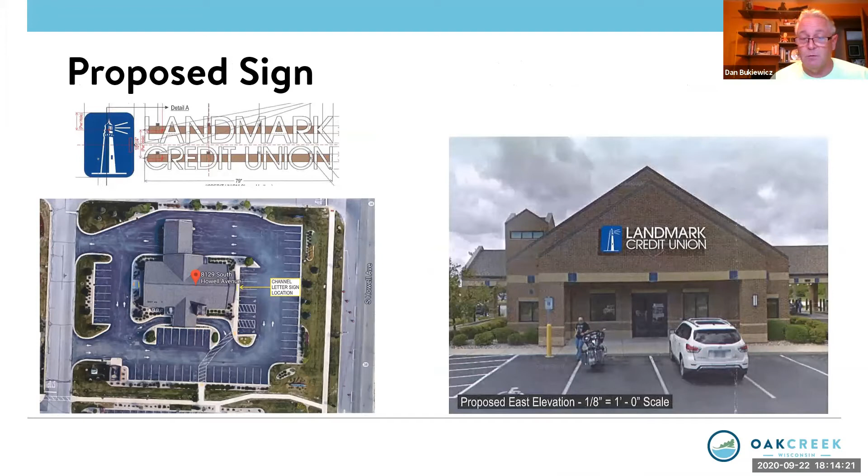Siebert moves that the Planning Commission approves a sign variance allowing the installation of one 3 feet by 6 inches by 13 feet and 3/4 inches wall sign on the east elevation of the existing building on the property at 8129 South Howell Avenue.

Thank you. Item 6B is a plan review for site, building, and related plans submitted by Crothall Laundry Service for an expansion of the south parking area on the property at 9905 South 13th. Kari?

Thank you, Mr. Mayor. The request is very basic. It is for the addition of 10 truck parking stalls on the south end of the existing property, which is in the red hatch marks on your screen right now. What they'd like to do is have a place for their trucks to park in the winter.

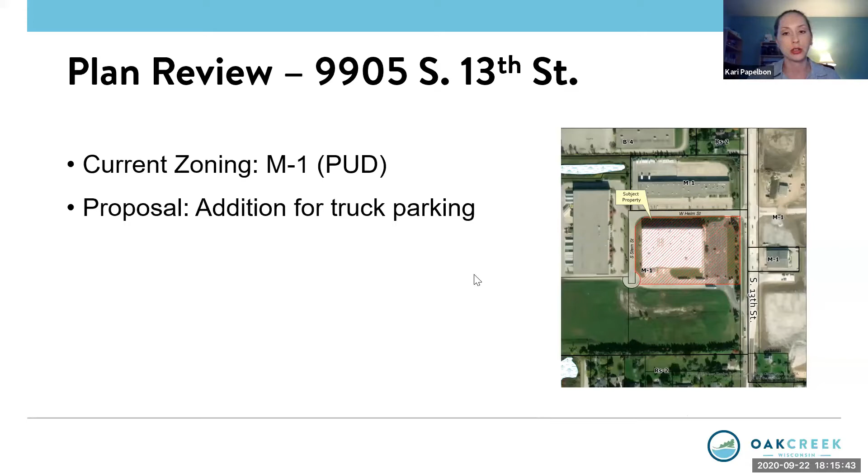They're going to add additional electrical outlets so that they can plug the engines in and keep them from going cold during the winter months. Those electrical boxes will be at each one of the stalls on the south end there.

If they are going to be seen, however, the utility boxes for these electrical outlets would have to be screened. There is nothing in the proposed plan that shows a utility box, or a separate transformer, or anything for these electrical outlets. If they would be seen from 13th Street, they would have to be screened. There are no other site modifications or any other additions for the building. Due to the location, landscaping is not going to be required for this proposal.

So there is a suggested motion that if the Plan Commission is satisfied with the proposal, that they approve with the following conditions, 1 through 3. Mr. Mayor. Thank you, Kari.

Is the applicant with us? Would they like to speak before we go to the commission, Kevin? Mr. Mayor, we have the civil engineer and the corporate engineer available to answer questions if needed. We did have the neighbor, Michael Faber, who had some questions on it. Mike, if you still have those questions, could you raise your hand? All right, he did not raise his hand, so you guys should be good to continue. Okay.

We'll start with Commissioner Chandler. We'll change it up. I do have a question for the applicant. And what's your question, Chauncey? My question for the applicant is, you've identified 10 additional parking spaces with electrical outlets. Are there any other safety measures that are required for these electrical outlets outside?

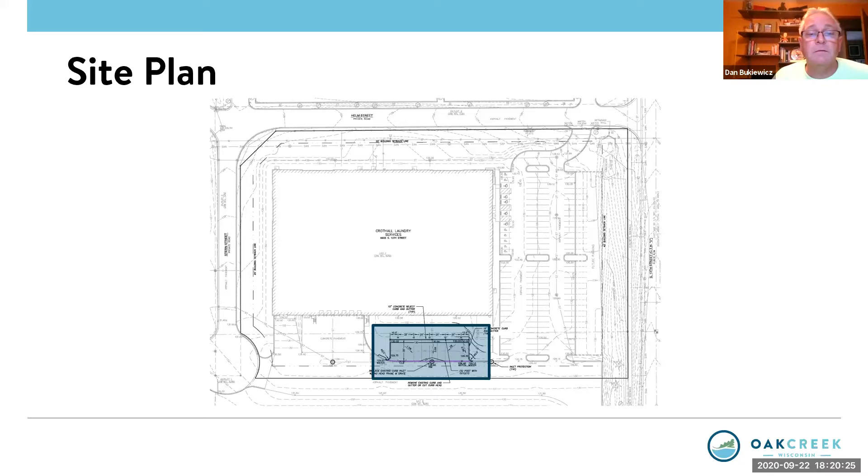Thank you, Chris. Greg? No, nothing from me, thank you. Dawn? Nothing for me. And Matt? We don't have anything either. Okay, Christine? Nothing here either, thank you. Okay, I have no further questions either.

Pretty well explained. So, Mr. Mayor, Mr. Faber did raise his hand just now. Oh, please put him on. Sure, Mr. Faber, you should be able to speak. You just have to unmute yourself.

Very good. Mayor, Commissioners, my name is Michael Faber, Capstone Quadrangle N17W24222 Riverwood Drive, Waukesha, Wisconsin. We're the neighboring commercial property owners with a building directly to the west, vacant land immediately to the south, which we are in discussion with staff on a building design that we hope will be in front of you shortly for consideration, as well as the vacant land directly across 13th Street to the east.

I just thought it would be helpful. We think that the proposed parking spaces from the applicant are perfectly compatible with our site design that we'll be coming in front of you with. And so as a result, we support the request and urge the Plan Commission to approve our neighbor's request.

Thank you for the input, Mr. Faber. Glad to see that you're that proactive, looking ahead with design and how things will match up to another affected property. So I appreciate that. Absolutely.

Any other further discussion or questions? Hearing none, motion please on B. Guzikowski makes a motion that the Plan Commission approves the site plan submitted by Crothall Laundry Services at the property at 9905 South 13th Street with the following conditions: 1, that all relevant code requirements remain in effect.

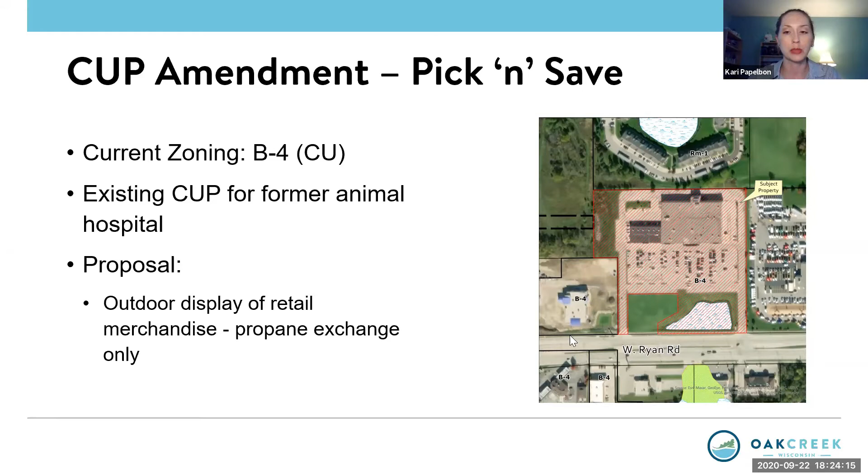So this is an amendment to that existing conditional use permit, for the outdoor display of retail merchandise, specifically the propane exchange. This is the entry elevation for the Pick and Save, showing the location of where they propose to put that propane exchange. You can see it's about 9.5, just under 9.5 feet from the far side of the propane cage to the end of that sidewalk area. The cage dimensions are listed 70 inches by 44 inches by 30 inches.

And there are a few things that are required in terms of location and compliance with fire department code, and those were incorporated into the conditions and restrictions. If there are any questions about what has been included, I will be happy to answer. Page 2 of 5 basically states there is one animal hospital and veterinary clinic that was approved in Ordinance 2632, and one area for outdoor storage and display of retail merchandise limited to one propane cage on the south elevation of the building, allowed in conformance with the conditions and restrictions. There's a separation for the specifics that were approved for the animal hospital and veterinary clinic and the outdoor storage and display of retail merchandise.

The specifics for the outdoor display of retail merchandise include that it's limited to one propane cage measuring 70 inches in height by 44 inches in width and 30 inches in depth. In accordance with all fire protection requirements and codes, it is allowed on the south elevation of the Pick and Save storefront. No other outdoor storage or outdoor display of any retail merchandise is allowed.

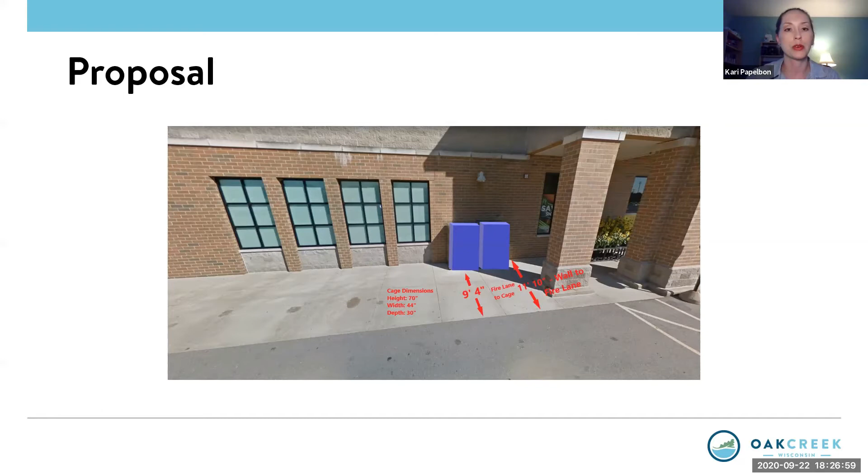Good evening, Commissioner. This is Mike Havey, Assistant Chief with Fire. All of the review material was provided to the commission, or excuse me, to Kari before the meeting. So as long as the applicants are in compliance with the requirements, we have no concerns.

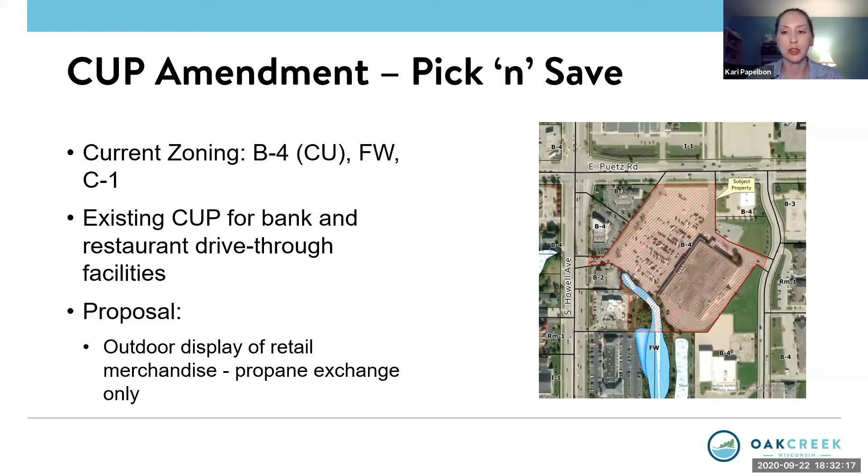You may recall the location of the multi-tenant portion has a drive-through on the south side of the building. This would add to that conditional use permit request for the propane exchange, again in front of the pick and save portion, although the multi-tenant portion does kind of blur here. Same size, although the location is a little bit closer to that fire lane.

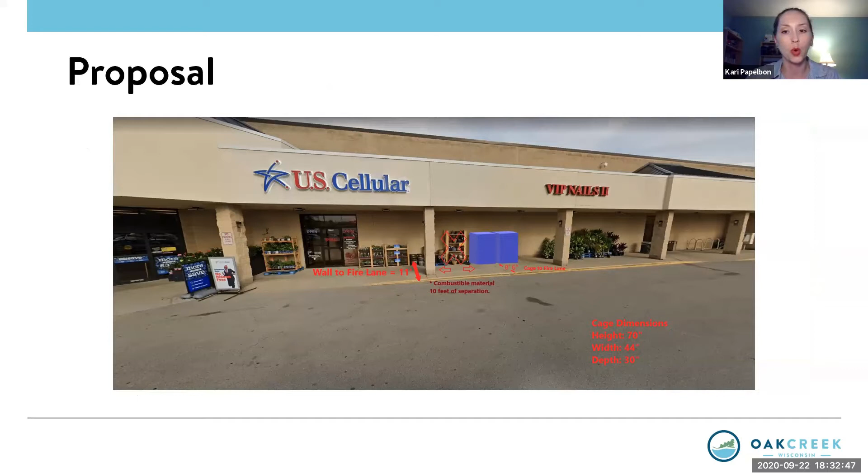It's about 8.5 feet. The previous application showed just under 9.5 feet. Same requirements in terms of meeting fire codes for location, and we will confirm that it is 1 cage for ingoing, 1 cage for outgoing, so a total square footage is being provided.

There is a suggested motion on the screen. If there are any questions with regard to the conditions and restrictions, these are kind of parsed out for the existing conditional use, and then the proposal, the same restrictions as with the other location are included in 3B.

Mr. Mayor. Thank you, Kari. Different location, same task to consider here. We'll start with Commissioner Chandler.

No questions. Thank you. Commissioner Siebert, no questions. Alderman Guzekowski, no questions. Alderman Lorik, no questions, thank you. Commissioner Carrillo, no questions. Commissioner Sullivan, none. Commissioner Hanna, anything? Nothing here, no, thank you. I would imagine fire has the same comments they had at 2320.

Mike Avey, Assistant Chief of Oak Creek Fire. Yes, no additional comments for this one.

I just have one comment, and it's not super relevant, but over on Howell Avenue, if the public's out there watching, unless you drive a fire engine, do not park in the fire lane there. It's a bad habit of people waiting in front of that merchandise. I'm surprised there isn't a picture of a car in that picture. That is reserved for our fire department in case of emergencies, so please keep those clear when possible. Other than that, I have no questions.

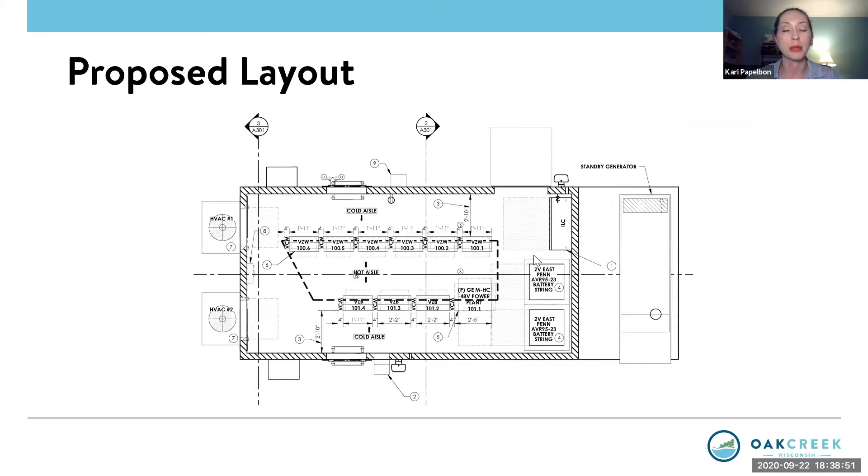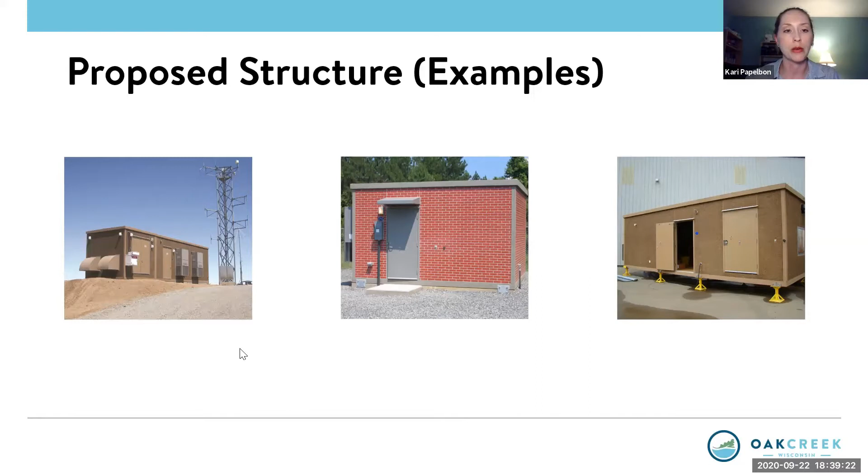With that information, if there are no further questions, there is a suggested motion for approval subject to 2 conditions of approval on the screen right now for Plan Commission consideration.

Mr. Mayor, thank you Kari. I don't know if the applicant's with us, if they'd like to say anything before we go to the commission. We do have an agent for the applicant available if questions are needed. Okay, thank you, Kevin. We'll see if he is needed.

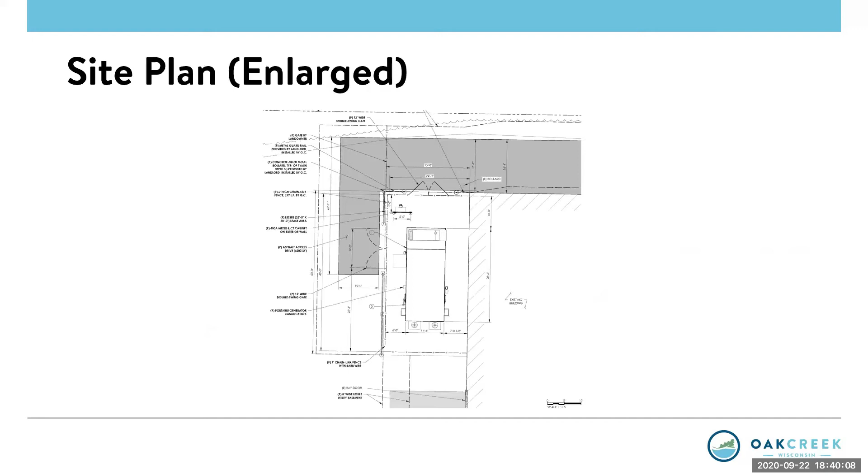We'll start with Commissioner Hanna. Yes, actually I do have a question for Kari. From the location map, I don't know if it's exactly located within another industrial park or industrial area, but is there any way we can add landscaping to this building or some sort of aesthetic instead of this like a block of concrete? Or is this shielded from the road?

Okay, so as long as it's not seen from the street, I'll be okay with no landscaping or anything like that. It just looks like a big box of concrete. Right, it's actually going to be completely screened from 10th Street by the existing building.

And when I did speak with the applicant regarding landscaping, none of the existing landscaping on the rest of the property would be affected by this proposal. So what's there now will remain intact. Sounds good, thank you. Okay, thank you.

Commissioner Sullivan? We have nothing from engineering. Commissioner Carrillo? Nothing. Greg? I don't have any questions or concerns. It was already spoken to that it's kind of tucked back behind that building down 10th Street, so I don't have any worries about it. Okay, thank you. Chris? I have none. Thank you. Okay, Fred? No questions.

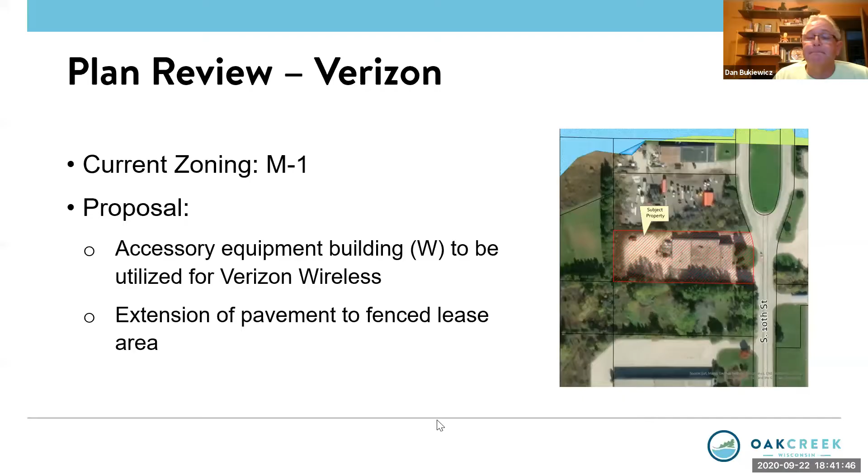Okay, Chauncey? I do have a question for the applicant. How often would someone have to go to this building for either upgrades or for repairs? Yeah, that's a good question. As mentioned, this is an unmanned facility that's fairly technical in its nature.

So we could say that a tech would come out, let's say once or twice a month, to perform maintenance work inside the shelter. It shouldn't present any additional traffic situation or any sort of nuisance with the service tech truck coming in and out of the parking lot. So that's about it, really. It's going to be a fairly intact, complete, high-tech facility that will run fairly hands-free.

And like I said, maybe once or twice a month, a tech will come out and take a look at the inside of the structure.

Bill, would you please state your name and address for the record? Sure, this is Bill Schrader. I'm with Insite RE Inc. Our offices are at 1S660 Midwest Road, Oak Brook Terrace, Illinois.

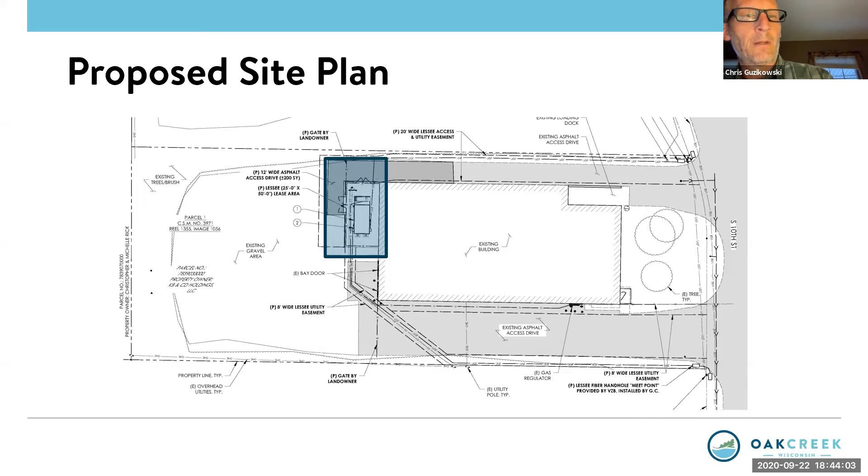Guzikowski will make a motion that the site plan review and proposed accessory equipment building west of the existing building on the property at 7555 South 10th Street, with the following conditions: 1, that all relevant code requirements remain in effect. 2, that all detailed revised plans are submitted in digital format to the community development prior to submission of permit applications.

Seifert seconds. Roll call. Hannah, aye, sorry I had computer issues here. That's okay, it happens. Sullivan, aye. Grillo, aye. Lorick, aye. Gavich, aye. Guzikowski, aye. Seifert, aye. Chandler, aye.

Thank you very much and good luck. Thank you. You're welcome. Item 6F is a landscape plan review.

It is to review landscape plans submitted by the United States Postal Service for the facility on the property at 2201 East College Avenue. Kari?

Actually, Mr. Mayor, Doug will be the one presenting this item. Okay, thank you. Doug, floor is yours. Thank you, Mayor, Commission members. Appreciate being here this evening.

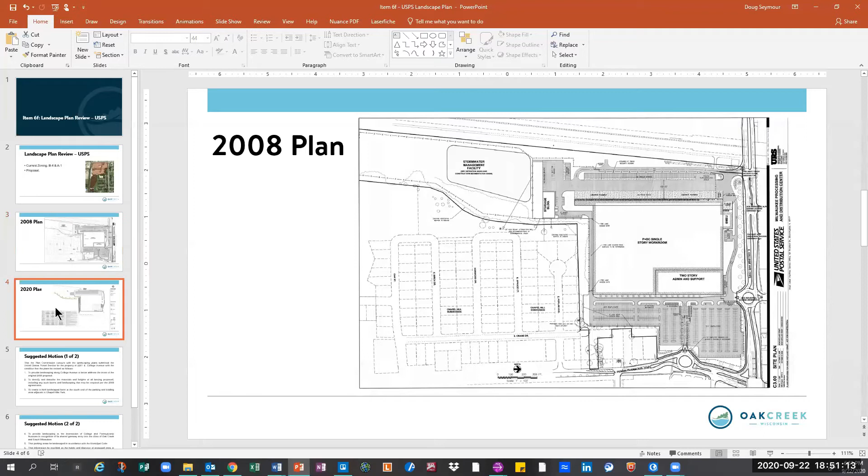So with that in mind, I'm going to break down my comments and show you the 2008 plan in its entirety. The comments respond to the sheets of the plan, and so this being the first sheet of the plan, it really, what was striking was almost the near complete lack of landscaping proposed for the perimeter of the property.

And again, recognizing that the scope of the building has reduced, there is still a requirement to berm and landscape those areas that are proposed for chain link fencing, which still shows up on this plan.

And while fencing is not part of this plan per se, and should be reviewed and approved separately, the plans do show the perimeter of the property fenced. And if the property is going to be fenced using security fencing and chain link fencing, these areas need to be bermed and landscaped per that 2008 agreement.

Oh, what was that? Sorry about that. I think Siri got involved in our conversation here.

Additional landscaping would also need to be provided at the northeast corner of the property. This is a prominent entrance to both the cities of South Milwaukee and Oak Creek and should be treated as such with properly designed and maintained landscape areas. It's showing absolutely nothing on that corner.

The second sheet is on the area which is affecting the Chapel Hills neighborhood on the south end. Obviously, the Chapel Hills neighborhood has been the most heavily impacted by the failure of USPS to abide by those 2008 agreements. And nowhere has this been more apparent than the removal of the trees and the vegetated buffer area between the park and that stormwater management basin.

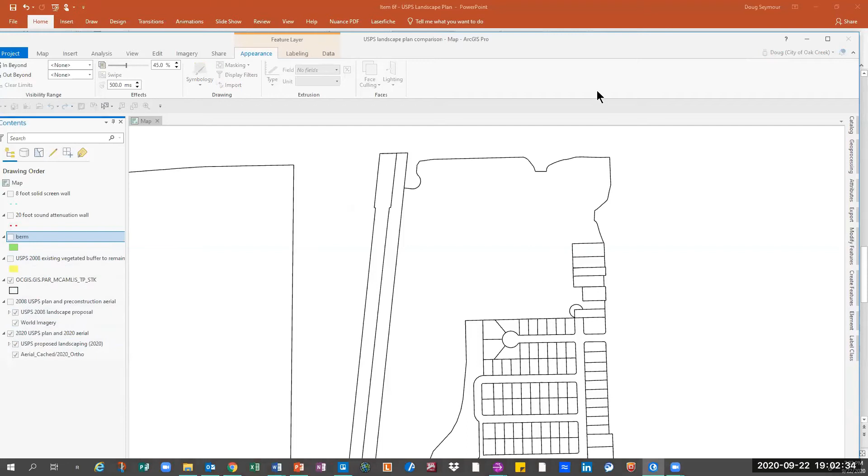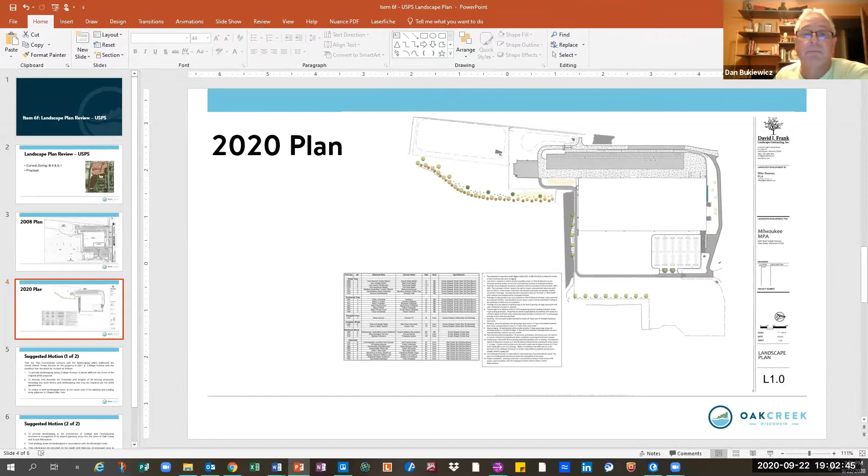Okay, go ahead, Mary. I'm particularly interested in this conversation, and I must admit I don't have the plans that are at the clerk's office, and I will seek those. But I am the first house among those 5 that have the post office in back, which means I am exposed to the west and the north.

And it's the north that I'm confused on, because I have a lawn service, and I know what I own. I mean, I know it's on the tax list, and it has been marked that that's my property, and they mow that. And I used to mow the other just to keep the weeds down, even though I didn't own it. I just didn't want that weed bed there. And then when the post office started the building, I stopped the mowing. I told my lawnmowers, don't put that on my bill, I don't own it.

But it's just a pile of grass, and then there's trees that were there before that are not, I don't own those, and I wonder what they're going to do with that section north of my house. The west of the house is pretty understandable. I think some kind of evergreen or some kind of tree, just to block it, I'm just walking right onto the property and back.

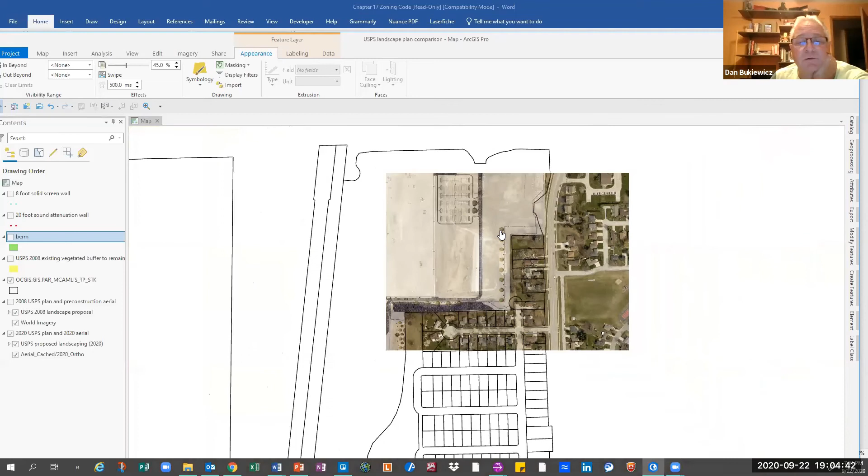Okay, maybe I should be dealing just with the planning commission and work with them, because it sounds like they're very involved in listening to the conversation. There's been a lot of conversation with the planning commission and the post office, and I think they're pretty well aware of what's going on. Well, they were, and there was a lot of conversation in '08. As Doug stated, when they came back around years later, they didn't consult quite as much with the city regarding what they wanted to do and how they were going to do it. And again, they are the post office, so they kind of exercise immunity from city ordinance. But that's something we can address.

That would be your north side property, and it even looks like they could beef up the western part of your back. Oh, there's a big part of the west, because if you look at the map you furnished me before this conference, I'm the first house among the 5. You go down towards Chapel Hills, and that's house number 5, and I'm number 1, and I have the biggest lot of the 5 properties. I have the north exposure because that's where the post office is, and then I have the west exposure. So I really have 2 areas of concern. And what really confuses me is what I own or what I don't own, or what I can ask for, or what I am eligible for in terms of the north property, because right now it's a mess.

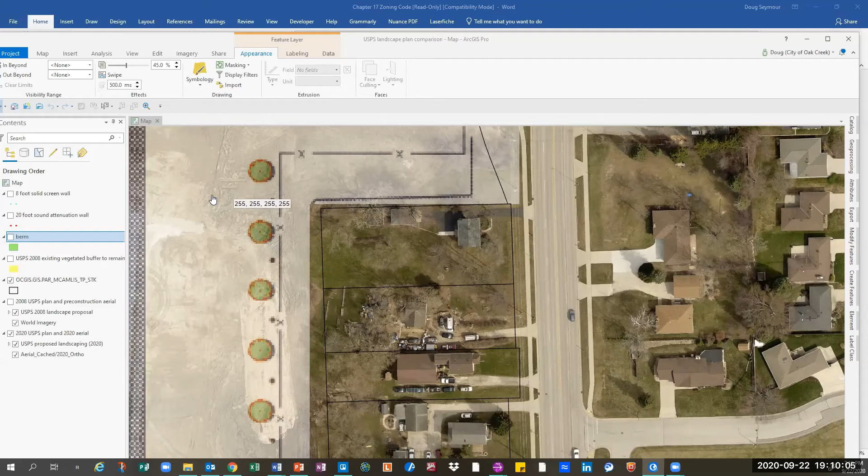But I will talk to Doug tomorrow and give him a call, then you can go to your other callers. We'll try to, like you said, they're going to do what they want. They just kind of started before you knew what was going on. So there are some issues there, but I'll call Doug and then you can go to the other callers. Thanks much, appreciate that, Mary. Okay, glad you got on. Okay, thanks a lot.

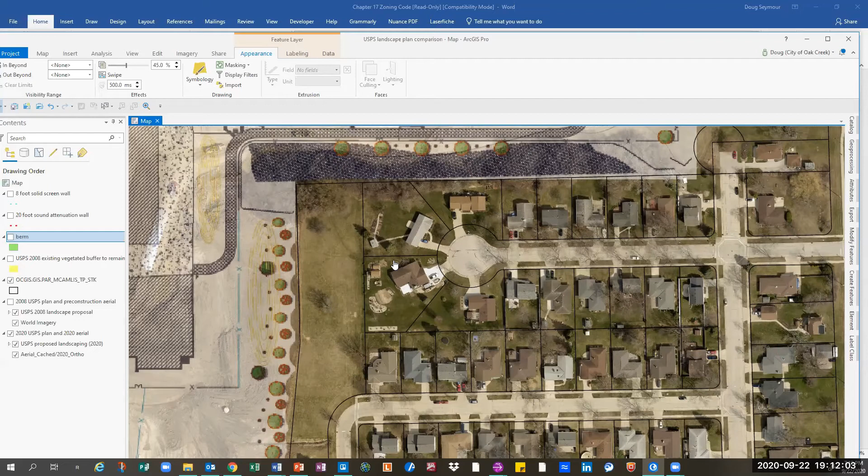I can only congratulate your Parks Department on the plantings they've put into that area of the park that is behind my house. Received those plans early spring, and excellent choice of trees that were planted there, and consequently absolutely no complaint on my side. They did a lot of diligence in maintaining them through our drought area this summer. So that was good.

The biggest problem I have with the post office stuff is once they plant it, they're going to wash their hands. What happens to the things that die? Let's face it, not every one of these trees are going to make it. That's sort of a known fact.

So all I can say is that it's somewhat worthless, the meeting tonight, because they are doing what they do. I don't know if any of you have spent any time coming over looking at the situation, but they're in my backyard constantly. The damage to my house and trees from that lack of dust management is there as well.

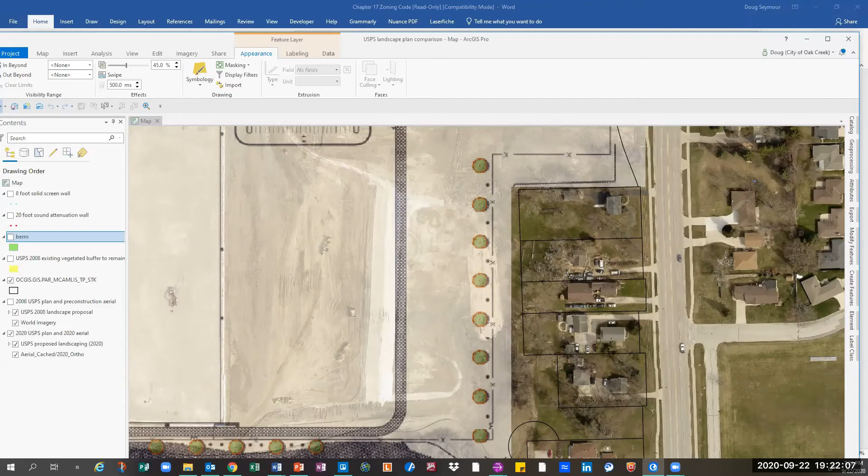No, thank you for the input, Mike. Appreciate it. If you could keep us posted on what's going on there, some kind of communication, I'd greatly appreciate it. As we learn things, we don't want to put out false information, so when we get solid stuff, we try to share it. I know we've done a couple mailings through there, particularly when we could finally get them to do a town hall meeting, so to speak. I know it was challenging this year, to say the least, and again, it all changed. I understand. Thank you. Okay, thank you, Michael, have a good night.

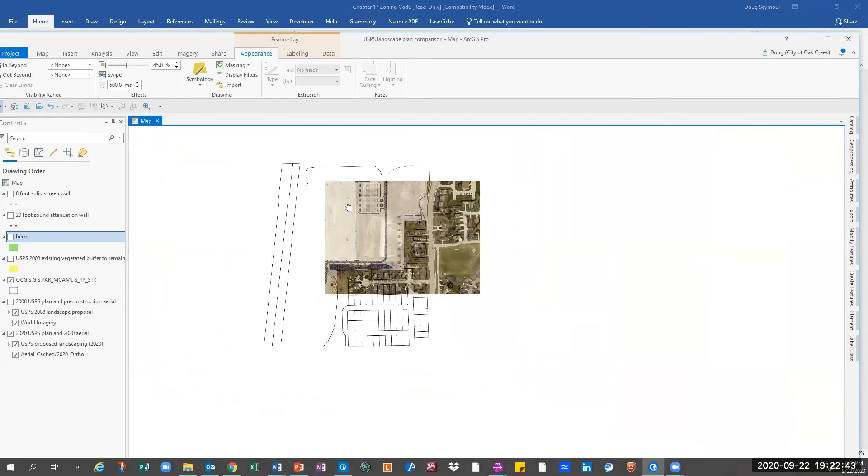Well, thank you, Robert. Again, we'll be discussing this with staff, and they're doing their best to get back to that original agreement on the 08. Okay, and for me, noise is a big thing in terms of if you're talking 300 trailers a day, like they indicated at the last town hall, that becomes a big concern. Understood, thank you for your time. Okay.

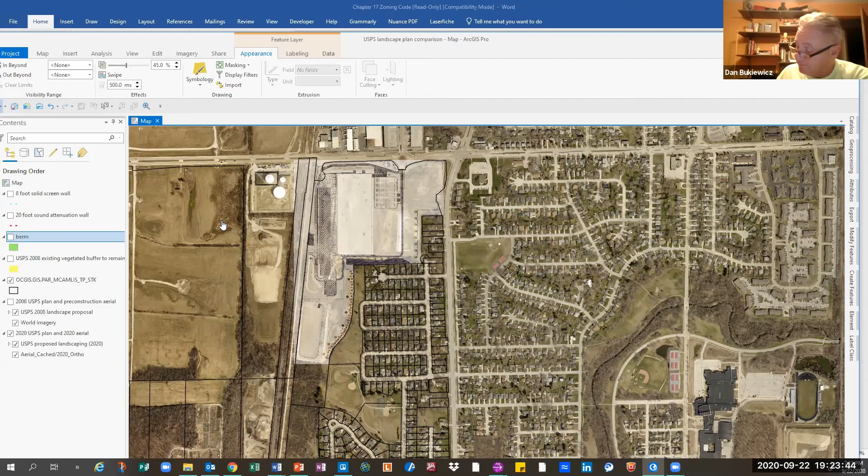Next please. All right, next up we have Rachel. Rachel, you should be able to unmute yourself, and then we'll need your name and address for the record. Sure, is it working now? Yep. Okay, Rachel Miliaka, 6470 South Crane Drive, and I am on the dead end of Crane Drive. Yep, that one.

So my concern is just the small amount of trees that we're going to have on the other side of the fence. There was a tree line there before that the post office had taken down, so I don't know that that's going to be enough of a barrier between us and the post office for the sound, as well as now we're going to have those west winds come whipping through there. And then there already is a water problem, so if they're going to be watering those trees, there's going to be more of a water problem, especially in that corner, because it seems like the water is accumulating there now.

So those last two rains, I know that they were extreme, but we did have big puddles of water in that area. That was one of my concerns that I brought forth last time we met with the US Post Office, was water. And that's still going to be a problem. And then, as the other two neighbors up the street had said, they did put the chain link fence and it's on top of the berm, so there's nothing covering that chain link fence.

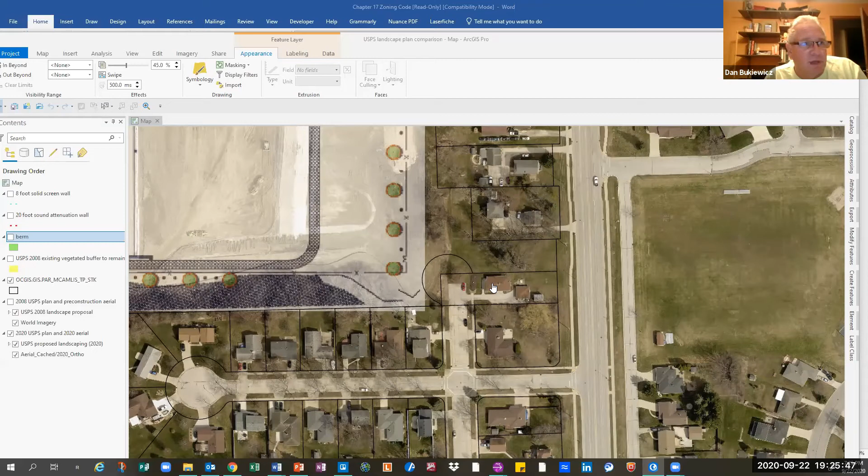Okay, Rachel. As we talk with the commissioners, we'll get a better explanation of their stormwater management. I don't exactly think they went through our engineering department, although I could be corrected. But when we talk to the commissioners, our engineer will give us a little better handle on that.

Okay, thank you. Okay, thank you, Rachel. Is that it? Yes. Okay, thank you. Kevin, next. All right, lastly, we have Nancy.

Nancy, you should be able to unmute yourself, and then we'll need your name and address for the record. Can you hear me? Yep. Okay, Nancy Subcheck, 6485 South Crane Drive, right across from Rachel, on the end of Crane.

Yeah, so my problem is the landscaping also, not enough. I'm just looking at a big parking lot or whatever they're doing there, a big fence. But my other question is, I have a dead tree, and I believe it's on their property because their markers are showing it on their property. We have their corner lot line marker right next to the tree, and it's dead, and it's going to fall on my property. I was going to have it taken down because I wasn't sure if it was mine, but the tree service told me it's theirs because they have their lot line marker there. So now I don't know who to contact about that.

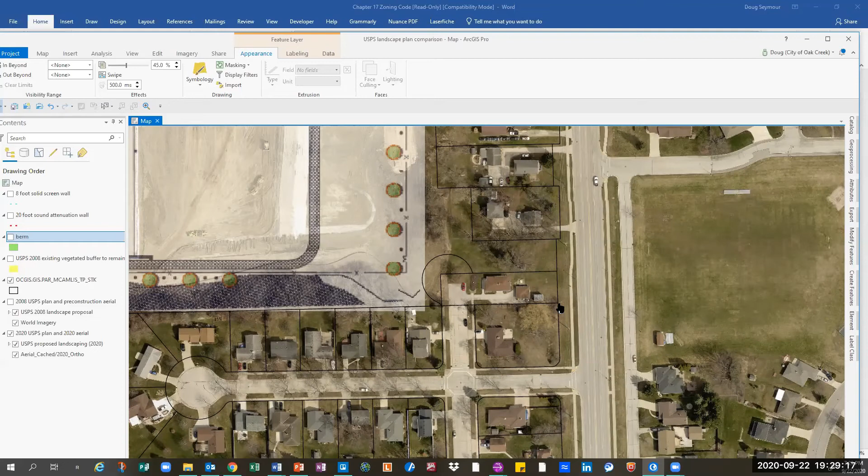Okay. Yeah, staff has their hands full with this one for sure. Kevin, was that the last resident? Yes, I believe so. Okay.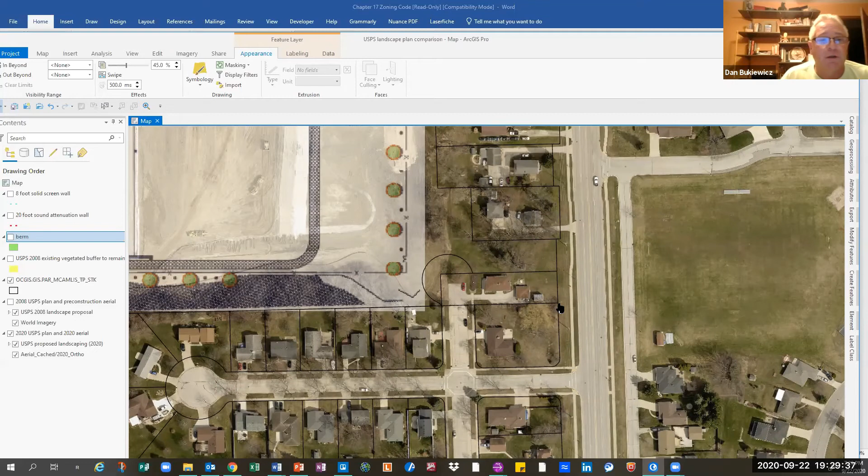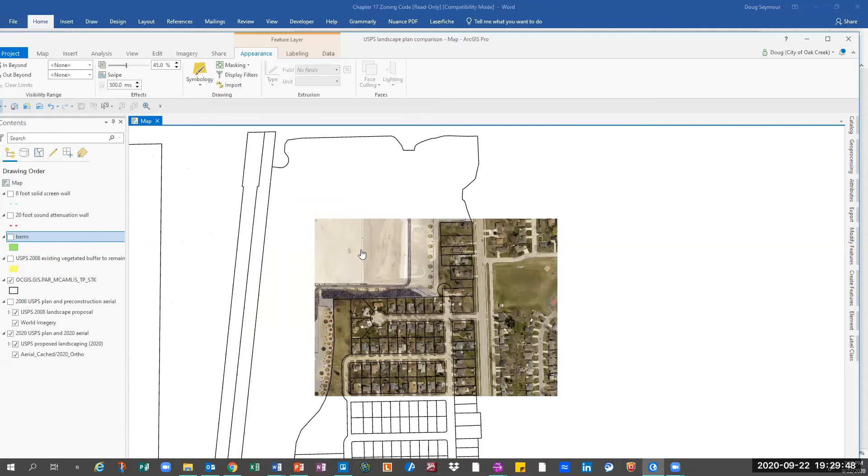Before we get into big time discussion, let's go to the commission, and I'm sure there's some questions there. Commissioner Christine Hanna, you want to start us? Sure. My first question is, do we have any maintenance agreement with USPS?

I'm sorry, maybe I didn't mean to butt in, but this is Doug Seymour. We've got a set of conditions and restrictions from 2008, which have since expired, and we have no other agreements with the post office other than their word that they would abide by those 2008 agreements. So Doug, if I understand you correctly, you had a maintenance agreement from 2008 but it expired.

So my next question is, are we considering having a maintenance agreement for that landscaping if approved, to make sure it follows the landscaping plan we're looking at, and addresses all those resident concerns? Well, again, from my perspective, when they say they committed to fulfilling all of their obligations from the 2008 plan, the maintenance of that landscaping would be one of them.

Okay, what if they don't follow that maintenance agreement? Then what happens? Then there is - well, I shouldn't say that. The avenue available to us is to work with our elected officials to remind them of their obligation to maintain that property.

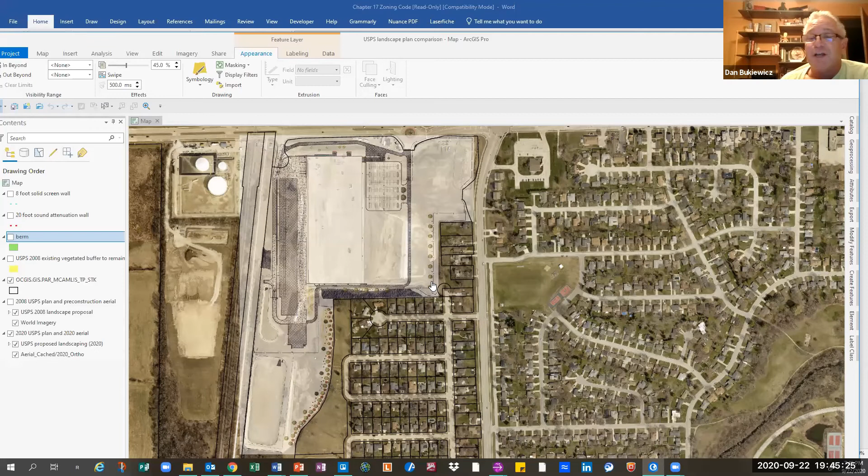A lot of my items have been discussed, and there is a concern specifically with the drainage, the barriers, the berms, the trees, landscaping, walls, etc. So I am in agreement with Alderman Guzekowski to possibly put this on hold. And then I have a question specifically for Doug in regards to all these additional items. Is it possible to add it to the list if we decide to place this on hold? And when I say add to the list, being the drainage items, a lot of the landscaping is there, but specifically about replacing those screening walls or replacing those trees that Oak Creek planted yet removed, etc.

Yeah, I mean, there's obviously a lot of different moving parts to this development and the obligations. I wouldn't characterize the landscaping plan as solving all of those concerns. And regardless of what the landscaping plan is, there's still obligations, as they have stated. Again, obligation being kind of a loose word because, as they've shown us in the past, we can't force them to do that. But we will take a look at what they've said they're going to do and what they've done, and remind them of their obligations that were made both in writing and in a public setting. And aside from just having some real frank conversations with our elected officials, that's the only way they're going to listen.

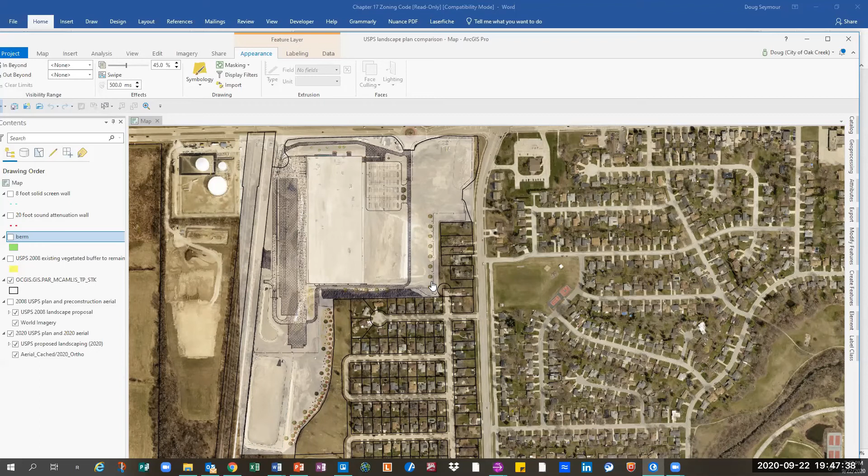Thank you, Doug. Kevin, is that it for the callers as of now? It appears so, Mr. Mayor.

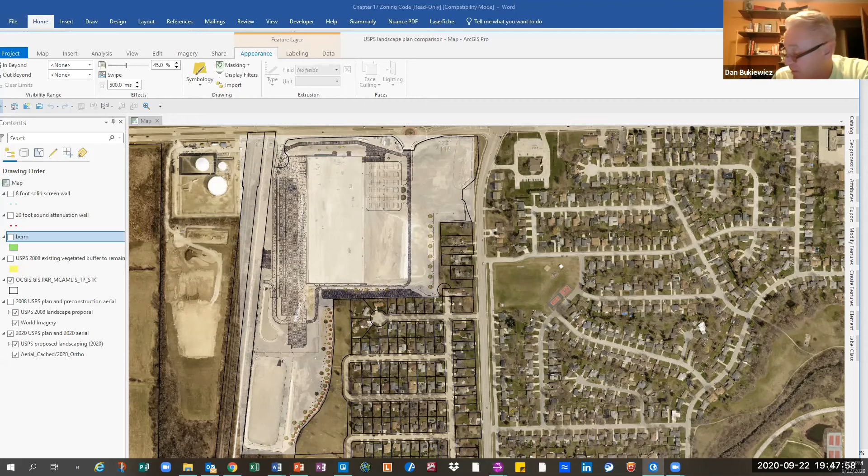Okay. I'm not going to rehash a lot of this because I think Doug summed it up really well, and the commissioners came up with the same points as well as the residents. This is nowhere near what Oak Creek standards would be in a normal project with a private entity. We're dealing with the United States Post Office. It's been stated they can come in and they're immune to our standards, and they pretty much took full advantage of this.

We did have the agreement in 08. It expired, and we're going to continue to pursue them. As Doug said, we're going through Joseph Ceci. He's got his marching orders and he's doing the best he can. But we want to pursue that, from the berms to the walls to the drainage. It's not the fence we want. There's numerous things, and we need a list. What we need is them to at least come to the table. Really, moving on this is nothing more than a statement by the city to say we don't agree with what you're doing.

We want you to go back to the 08 plan and do it. We haven't gotten there. I think Doug summed it up best. It's very frustrating as an elected local official when you work with state officials on road projects, or federal officials for that matter. There's always a level of cooperation between organizations, maybe a little bit of disconnect. But this is insane. This is just the government doing really whatever they please.

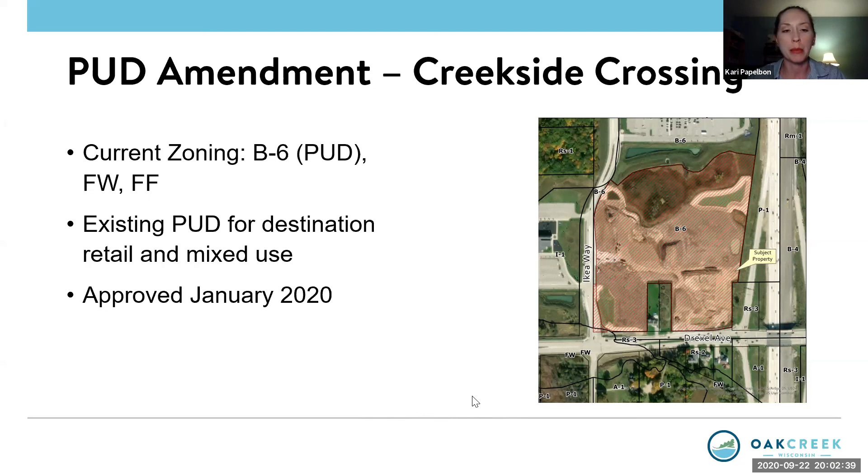So the proposed amendments are to basically assign owner responsibility for signs within the public rights of way. This will be coming before the Plan Commission for an overall sign package, kind of talking about the unified development signage. So we're talking about wayfinding here and the entry signs.

Clarifying parking lot setback and landscaping requirements. These are for the individual development lots, getting some more clarity on that in terms of setbacks to where we have shared parking arrangements and landscaping. Therefore, one of the concerns is that if we allow for shared parking, that doesn't necessarily meet the interior landscaping requirements. So this is allowing for those shared options.

And amending the landscaping requirements. Also clarifying that the overall PUD has separate setback requirements for certain circumstances. So if you turn to page 4 of 6, you will note that there is an additional column in the setbacks that's looking at front and public right-of-way setbacks on the exterior perimeter of the land area that's included in the PUD, and also the front and public right-of-way setback interior to the PUD. We have an exterior perimeter requirement, and we also have a requirement for setbacks to the interior public roadway. So we wanted to make sure that that was clear for all of the projects moving forward.